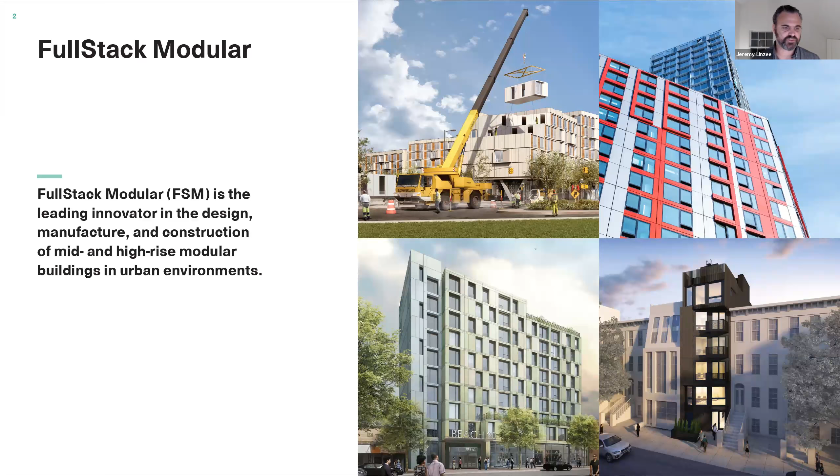So just a little bit about us. We're based in the Brooklyn Navy Yard. We're one of the leading innovators in the design, manufacture, and construction of mid and high-rise modular buildings in urban environments. Our approach is technology-driven, fully integrated, and radically efficient. So we can build complex projects faster with less disruption, lower cost, higher quality, and importantly for us now, a smaller carbon footprint.

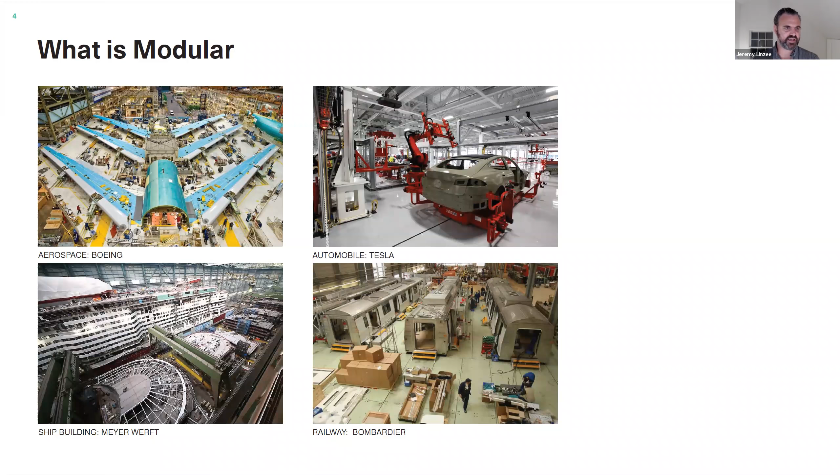Essentially, the first question a lot of people are asking is, what is modular? What does it mean to make a modular building? The first very broad description is essentially it's building something in a factory. It is manufacturing something in pieces that can then be brought to site. And of course, so many industries today are manufactured in factories and then delivered to a site.

The modular we're going to be talking about, and I think the one that is seeing massive growth and has potential for massive growth, is the multifamily and sort of larger scale modular. Within this conversation, there is another whole set of this for modular single family homes.

There are pluses and minuses to that approach to modular. We're not going to get into that here. So when we're talking about modular in this conversation, we're going to be talking about multifamily structures. You can see stuff is happening in Europe and has been happening for some time, and is now just beginning to happen in the United States.

Two notable projects in New York were the micro housing project, which was actually designed by my friend Mimi Hoang from nARCHITECTS, and the project that FullStack was born out of, which is 461 Dean Street by the Barclays Center, which is currently the tallest modular building in North America.

Also, when we think about modular, companies all have different approaches and different strengths in terms of what they do. So think about, first of all, how the mod is made, and the two options on the market currently are wood and steel, and then how much of the process is integrated. For instance, how much of the building does the modular builder actually build and deliver to the site?

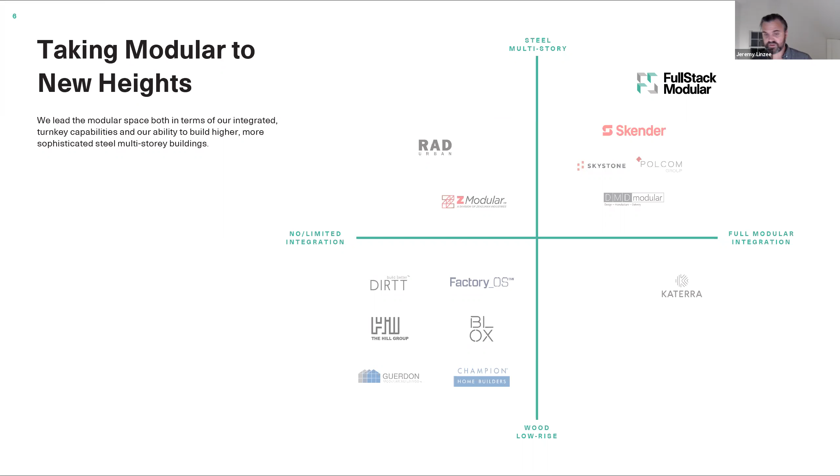For instance, in FullStack's case, we build higher than any other modular company, and we also integrate more. Other companies choose a business model that does not do that. And frankly, right now within the modular industry, we're seeing a winnowing of companies due to different business models. So it's interesting to see what will come out of this current marketplace and how it will work.

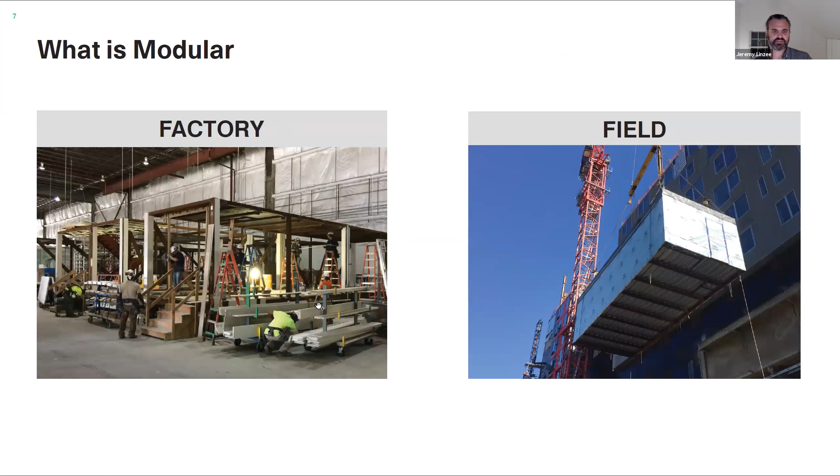There are two sides to modular: there is the factory side, what gets built in the factory, as I was saying, and then what happens in the field. So these are all some basic ways to understand modular. And this is a photo of our factory with Dean Street underway.

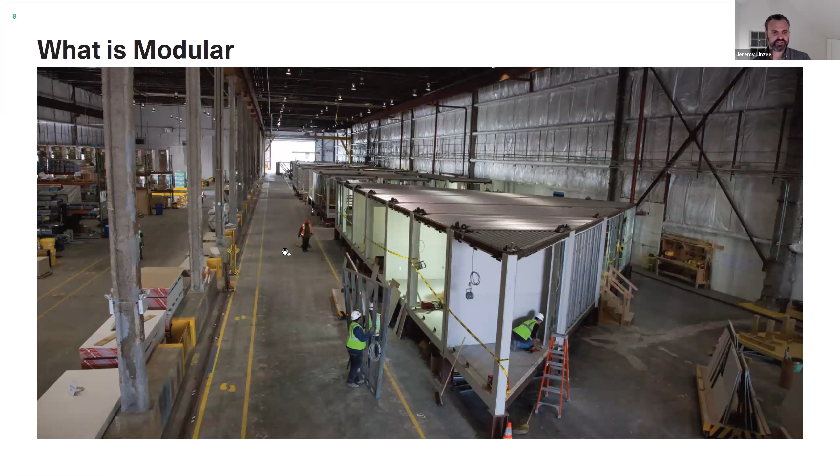The other thing about modular is basically the delivery system for the building, for the units. Modular buildings are built out of, essentially, we sometimes even say it's like Legos. You have boxes that stack, and that box will have a mate line where it joins the other box. It will have a chassis. Some are wood, like I was saying before. In our case, we're going to focus on the steel chassis modular system in this presentation.

And a lot of what then goes into that chassis is built as an assembly and a sub-assembly. So from a chassis to a bathroom to carpentry, to full finishing, to an enclosure, all of those things will be installed in that box and then delivered to the site and then stacked. And we'll go over that process a little more in depth.

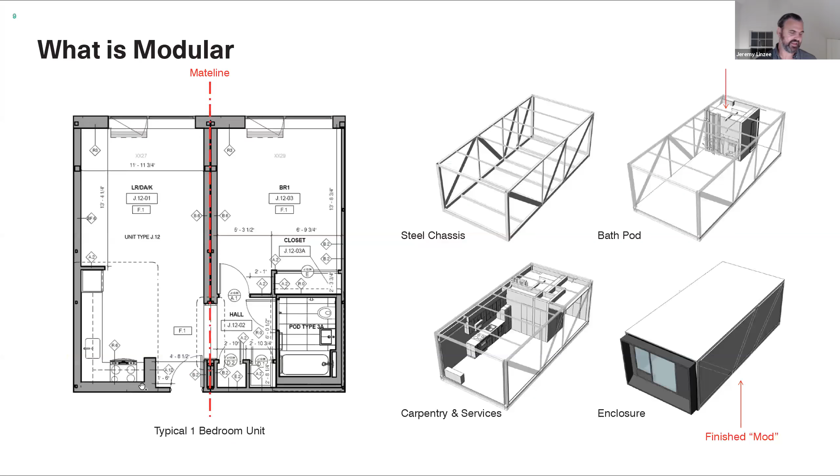Also, speaking of disruption, there's less neighborhood disruption, and also 67% less waste, because a modular building is built faster, and also because its major building components are assembled off-site and then assembled on-site very quickly. For instance, we can stack 10 to 15 mods a day.

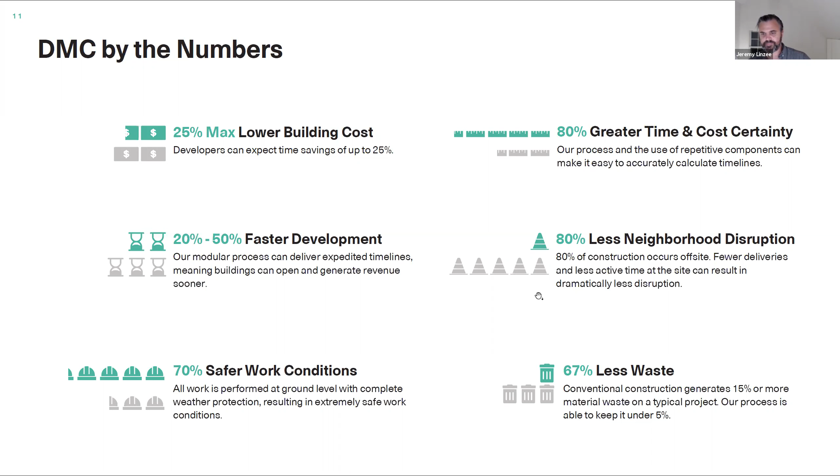There's a lot less neighborhood disruption. Interestingly for us, and this is maybe for another discussion, but I put it here, how you contract design, manufacture, construct services is still very much something we're trying to get right.

In our current arrangement, we typically do an analysis and initial estimate before we engage with a formal contract. We then go to a modular blueprint agreement, which takes us through a schematic plus. We call it an engineered schematic, where at this point we have 80% cost certainty. The final stage, the modular construction agreement, takes us through the remaining parts of design and then through to construction.

Design, manufacture, construct. We're going to talk about each of the phases. The first is design. Modular analysis, design for manufacture, and integrated digital workflows are all happening all the time in our process. In many ways, a modular building is a manufactured product, and therefore it wants to have a logic and an ability to be replicated.

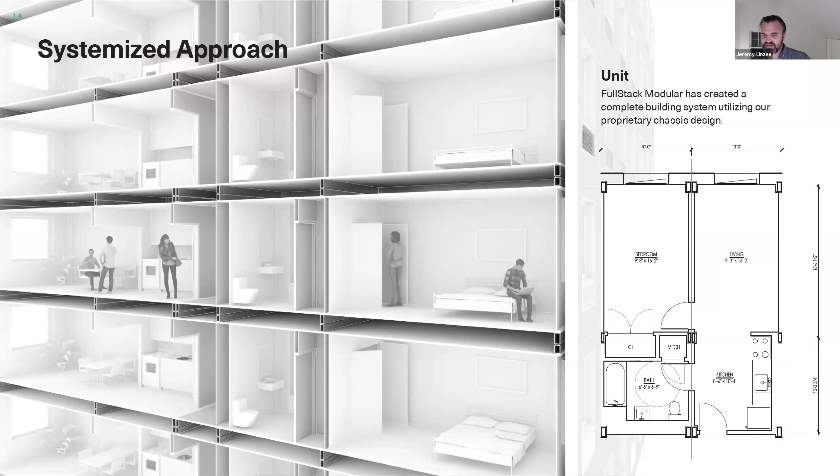For projects that we design in-house, we've developed a series of flexible components, and the goal in this design process is to have the fewest different components necessary. In a way, designing a modular building is like a bunch of information going in and spitting out a building. The more elegant, clean, precise, and efficient that code is, so there are the fewest discrete parts, the more successful that building can be.

Interestingly, when you read about modernism and the theory of modern architecture, there's a lot of that inscribed in it. But that's more of a history lecture, so we'll avoid that.

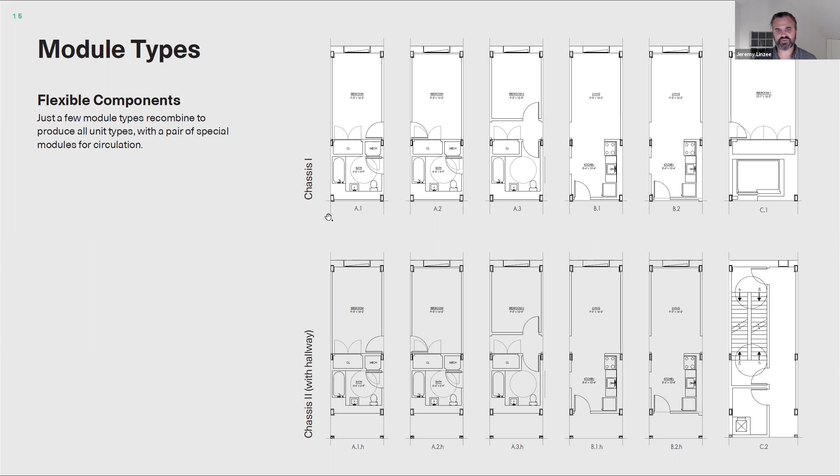With our flexible components, which can create all sorts of different layouts, we then make unit types out of them, and can organize unit combinations very rapidly. We have a parametric system set up for that organization, which, if we have time, I can preview at the end, but I want to move through the main lecture.

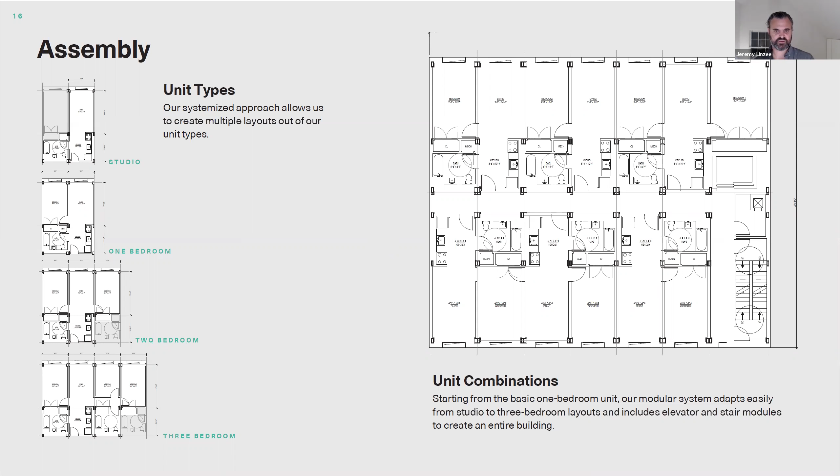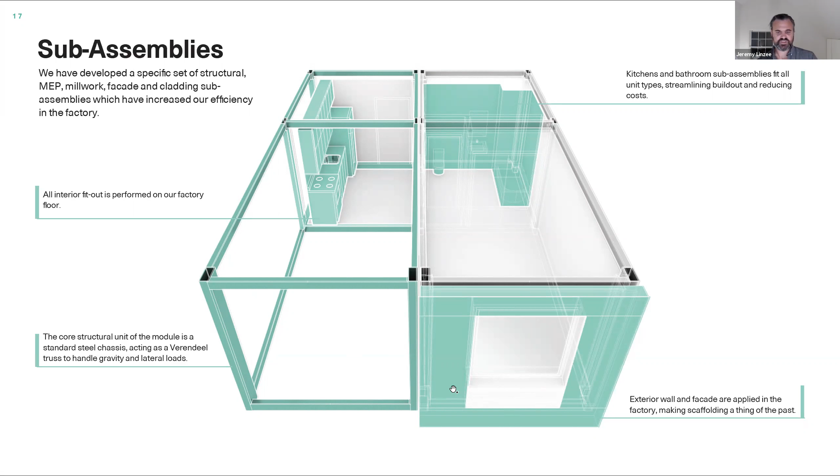Everything going into the chassis is thought of as a sub-assembly. The kitchens are sub-assemblies with their own sub-assemblies. The bathrooms are the same. The facade is also a sub-assembly. Typically, facades are fabricated by a separate facade manufacturer and then brought to the factory and made part of the final assembly.

Some of the innovations FullStack has come up with are, one, our structural system, which we'll describe in a second. Self-sealing facades are really important for us. When you use our mods to stack a building, the result is that it is watertight. The mods stack and seal. So we don't need to bring scaffolding back to seal up the exterior of the building.

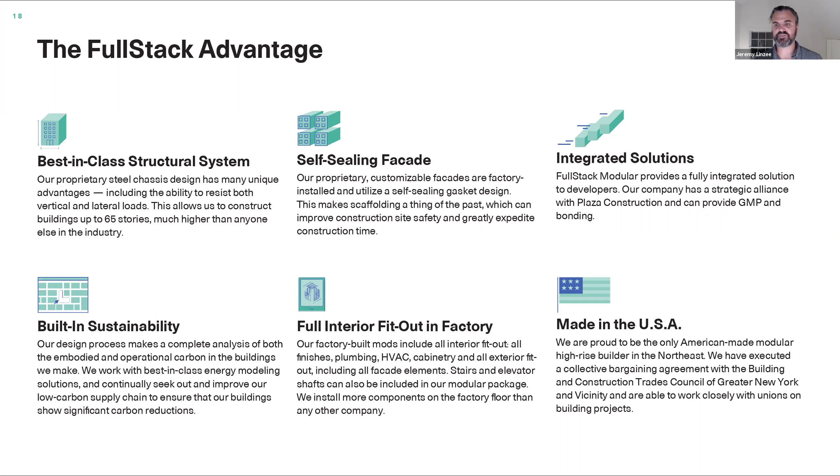We are also constantly engaged in developing our design technology, whether it's parametric design, integration of that design into the factory floor and site management, as well as incubation with other like-minded software or technology producers.

We learned this somewhat the hard way on Dean Street, but in manufacturing you're always trying to make something better. Dimensional accuracy is the key. We typically operate with a tolerance of 1/32 of an inch, and everything starts with laser metrology to assure that all of the mods are within those parameters.

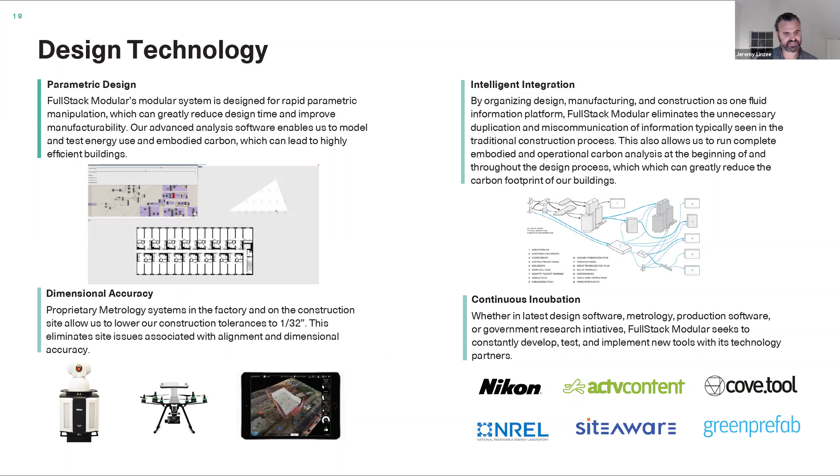We also use drones to do site metrology so we can measure a poured foundation and figure out where it is off, so we can make adjustments both with our adjustable pieces and within the mod shimming itself.

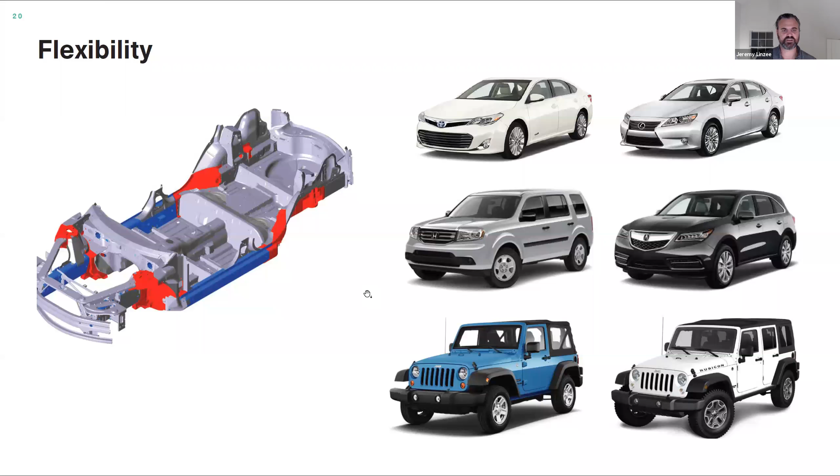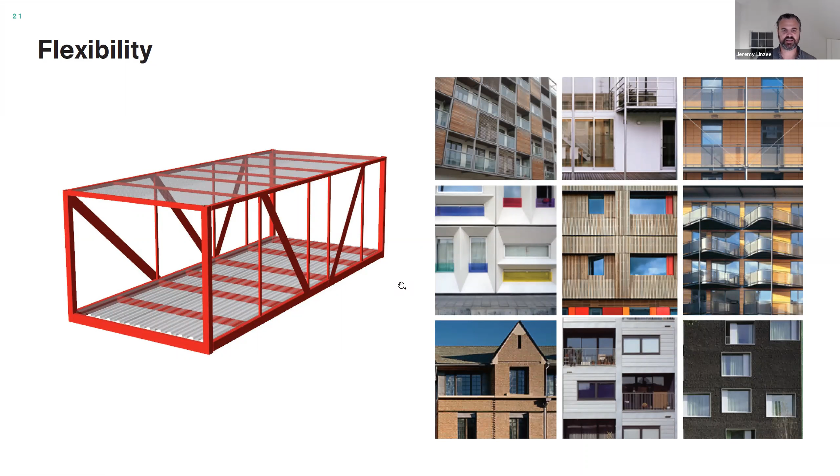Within the design process, we're always thinking about flexibility, like how does one chassis system create six different automobiles? For instance, with our chassis, all of the different kinds of facades that we can apply to it. That's important, and it comes through in our recent work.

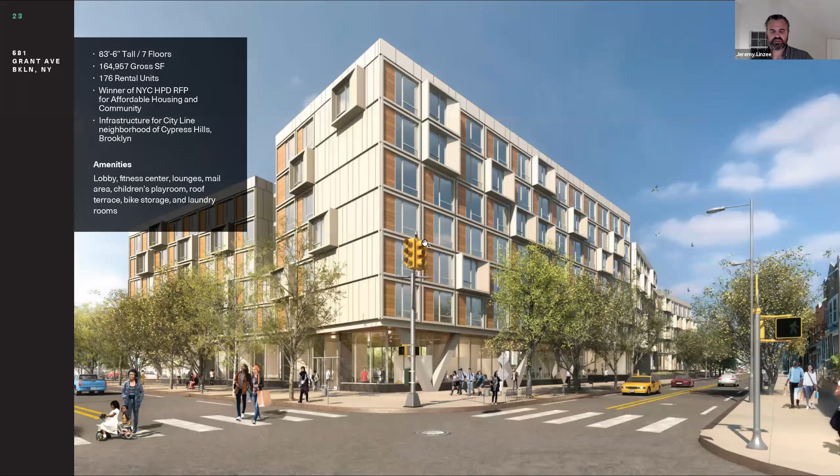This is Dean Street in Brooklyn. And then 681 Grant, which is a project we've been working on with Think Architects in Brooklyn in the Cypress Hills neighborhood. We also have a 6-story walk-up in Harlem and an 11-story building in Queens, to name a few.

So then the manufacturing side of things. So typically, we start with the chassis. It's the building block of the system. It's the first thing that goes onto the floor. It is made out of steel, and we've been working with Arup for the last 5-6 years on creating a very robust system that has sort of built-in logic so that when we engage each project, we have a starting point already in our design that can then quickly be oriented to that design's needs. And then, of course, sub-assemblies, which we're going to work with to create all the things that will then go on to the assembly.

And a lot of what we do starts like this. We will work with the architect or sometimes in-house to create a very, very robust Revit model. And the Revit model is basically the key. I'd say we have almost the bolts in this model of where everything will go. And then that Revit model will be, well, I guess not exploded, I guess carefully positioned into our fabrication documents. So the ceiling framing will come in as a ceiling framing document. Wall finishes will come in as a wall finishes document. Plan and fixture types will all come out.

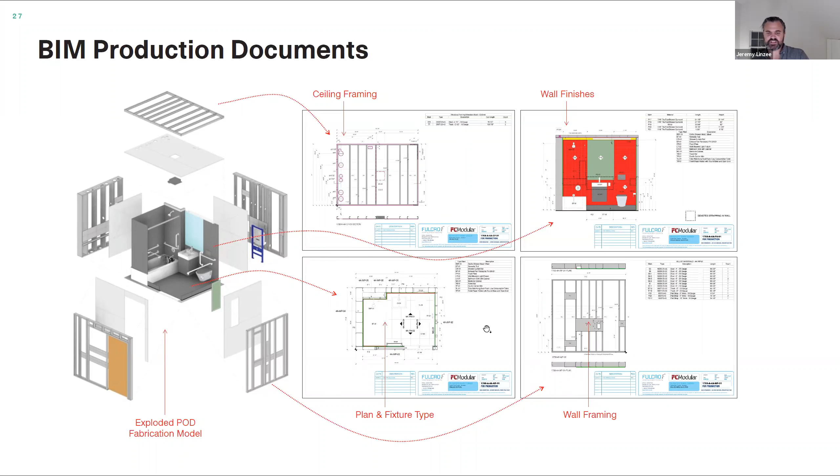And this has become a very interesting learning process for me as an architect moving into this space, the power of it, and also how procurement shapes design. Certain things are available, certain things are not available in certain timeframes. And so how we develop the supply chain as architects actually becomes an interesting question, and one that when you sit in the modular design chair becomes very apparent very quickly.

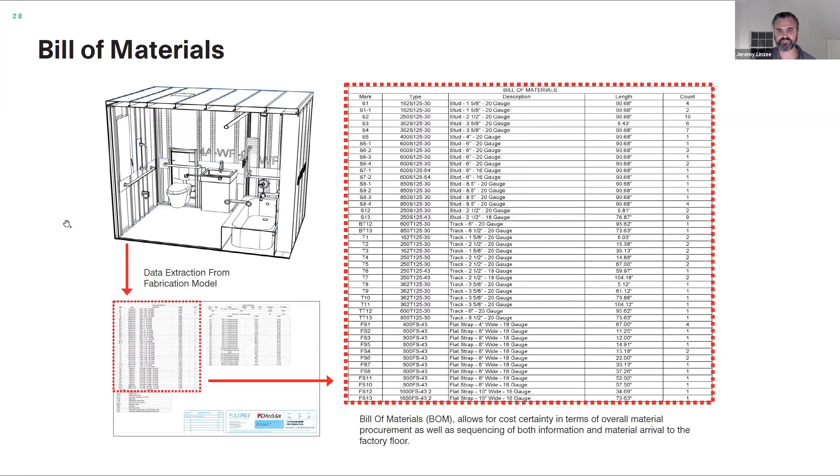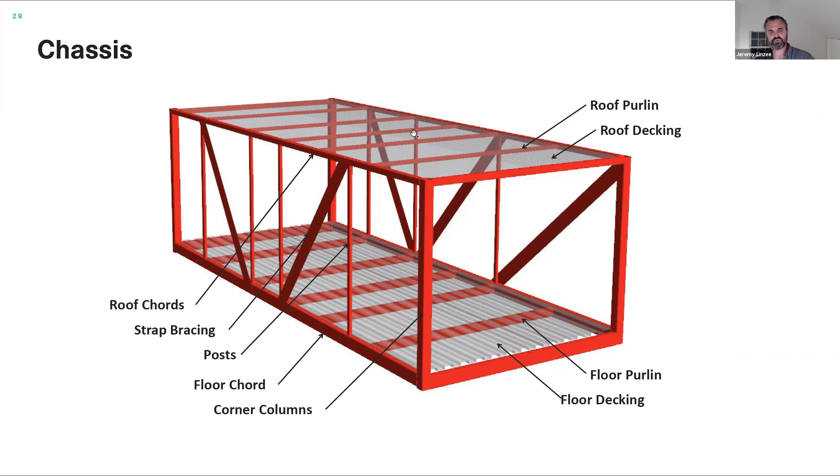So then the chassis itself, steel welded. We've actually refined this design and simplified it with Arup. This was the chassis used in Dean Street, but we now operate with basically a 6-column structure. We've taken away the straps, which tend to flap when the trucks were driving down the highway at speed. These would start to vibrate, and it would get a little crazy. So now we typically have 6 columns on each side, 1, 2, 3, 4, 5, 6. Those will transfer all the way to the ground. And it's a very, very simple system.

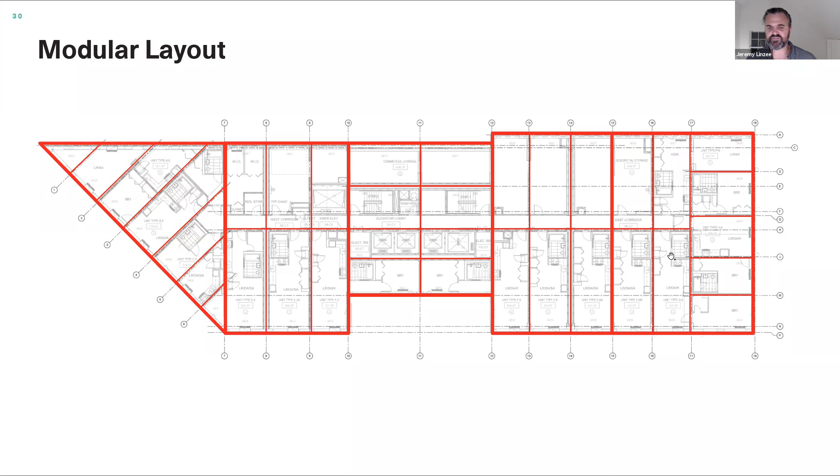Also, a lesson learned from Dean Street: triangle mods do not work. This was actually a real nightmare when it came to getting it right. It was gotten right, but you learn quickly, like, this is not ideal. Also, the fact that there were mods turning in this way was also not ideal. And so we try to work through buildings with a very, very straightforward grid system as best we can.

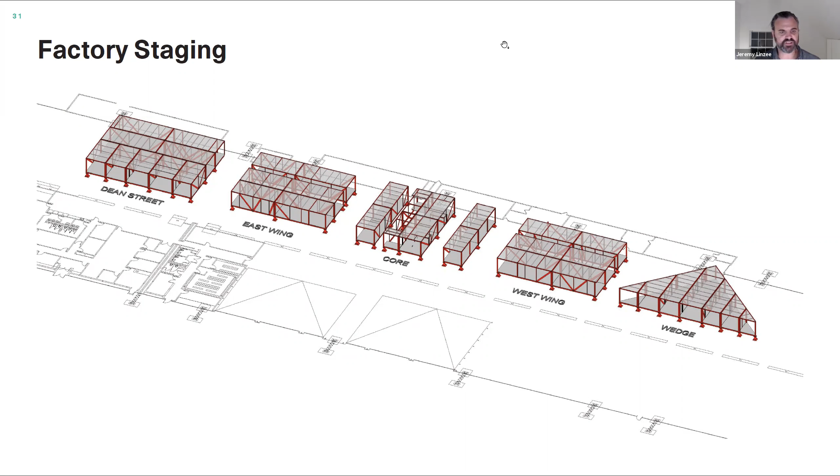Here's the factory staging. This is sort of the floor plan of the factory and how each type of mod was set up, constructed, put on a truck, and then brought to site and stacked. So this process would be ongoing. And here's some images of that happening.

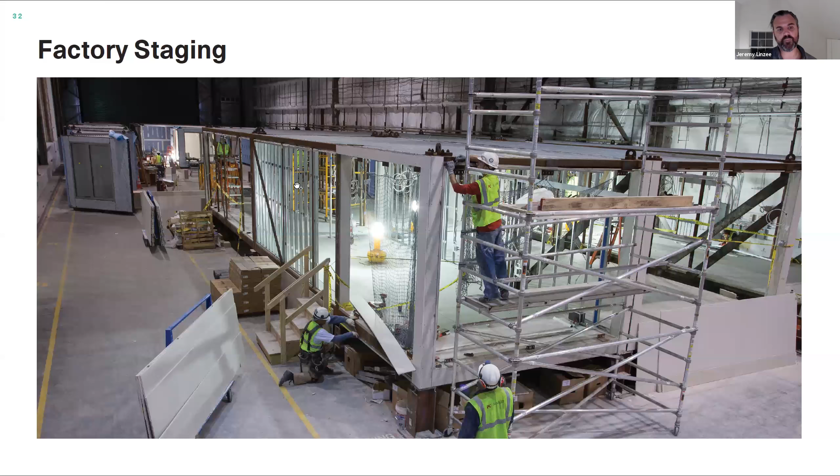You can see, for instance, this wall here, or this framing here, would have been constructed from a fabrication document on a table, which I'll show you in a second, and then brought here to be assembled. So it would not be assembled stick by stick. It would be fabricated as a whole, and multiples of these would be fabricated at once. We'll get to that in a second.

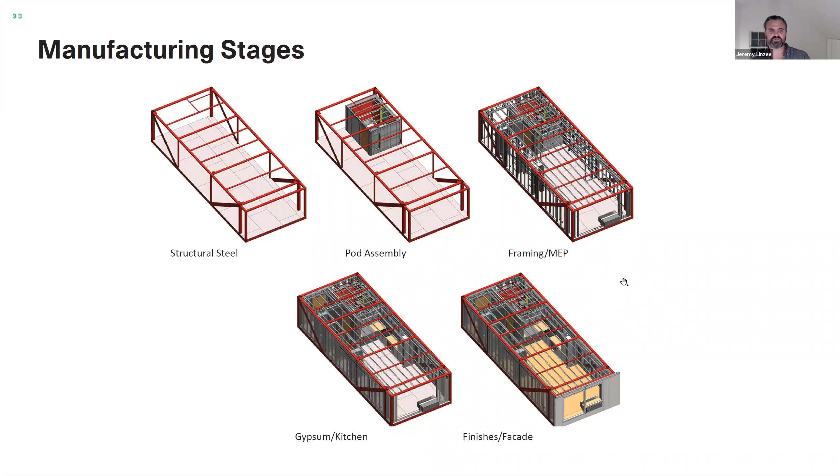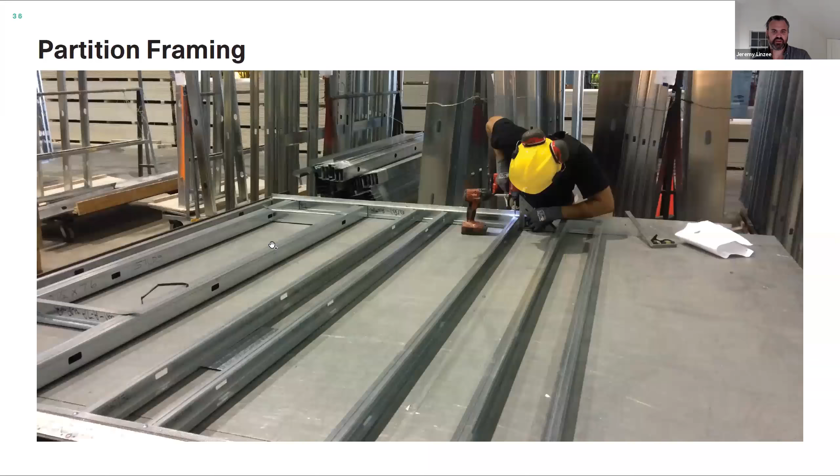So the order is structural steel, pod assembly, framing, and MEP then goes in. The kitchen, the gyp walls, and then the finishes and the facades are the last thing we put on in our process as we build out the mods. And MEP, we actually have a high level of completion of the MEP. Typically in the building, there is a single chase, typically in the hallway, which runs the length of the building. And then, of course, interior finishes are all done in the factory.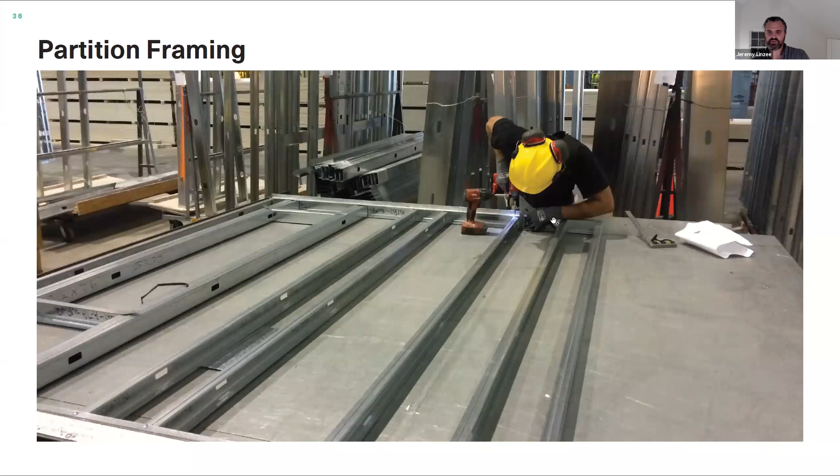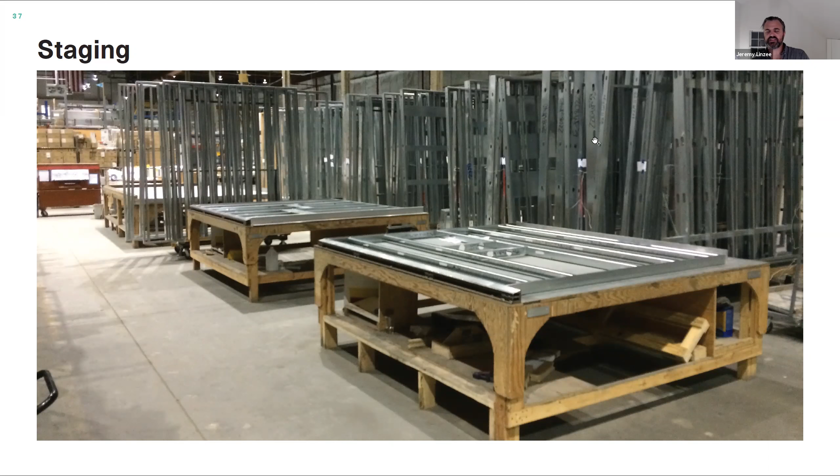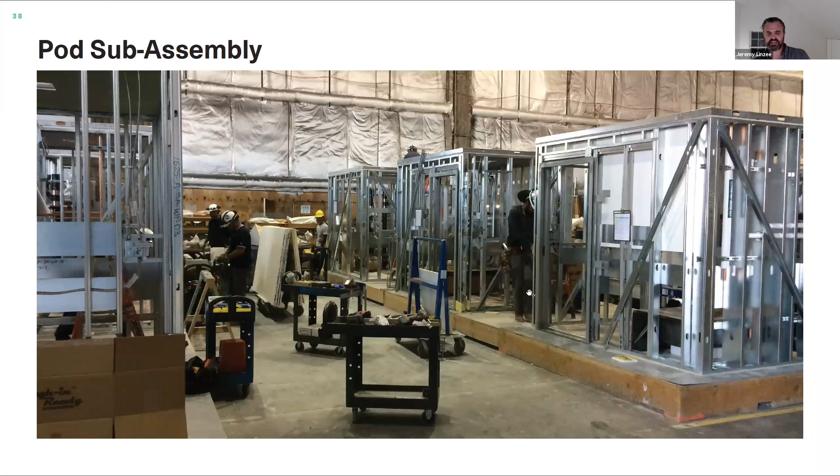Here's that framing table I was discussing. Again, one worker will work on multiple of these in a day. As mods get repeated, they'll be measuring from a simple layout set, which will dimension to each edge and very quickly be assembled. And here's that staging. You can see how multiples have been created, labeled, and there's an extensive QAQC process which identifies each assembly or sub-assembly, locates it, checks it, makes sure it's completed correctly, and then assigns a yes that it can go into the assembly. Here are bathroom pods being assembled.

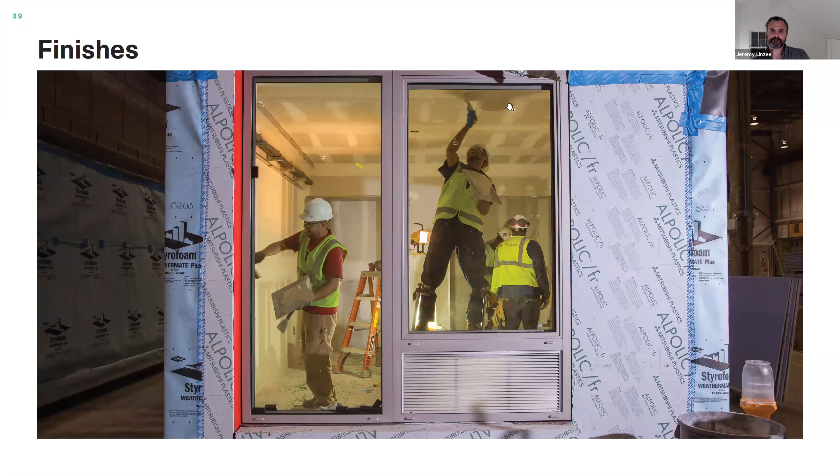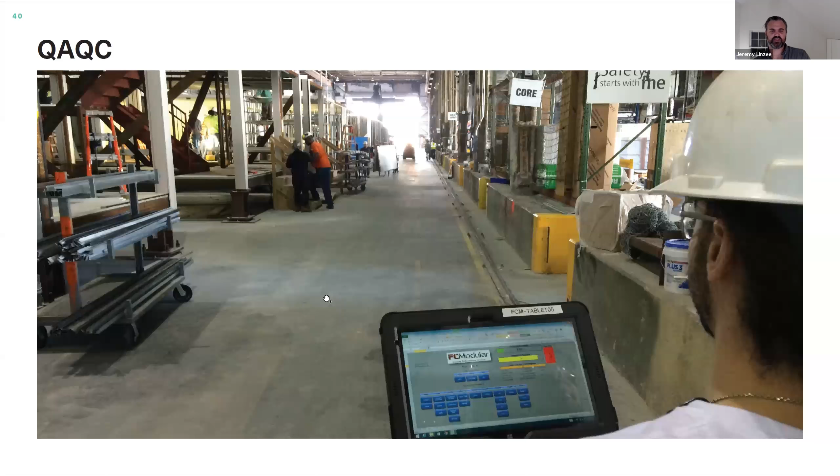And then here's the facade being put on with the gyp as well going up inside. Again, lots of classic manufacturing QAQC processes involved. And then once we're ready, that mod gets picked up from the floor and brought out to be put on transport to the site. And then it becomes part of the construction.

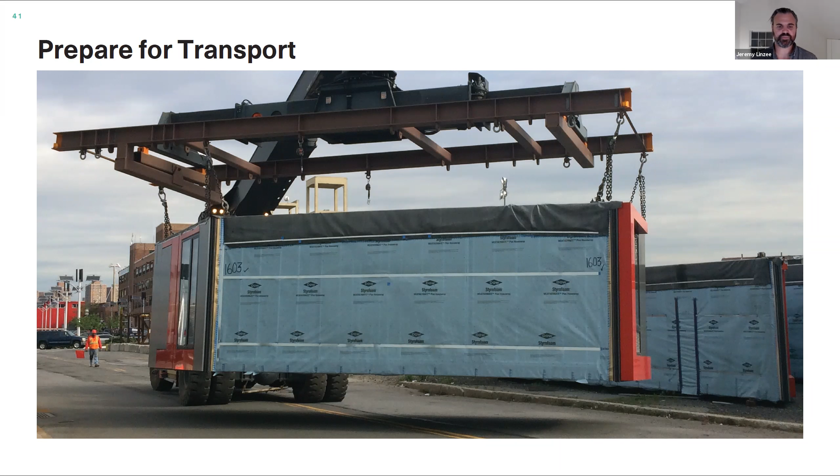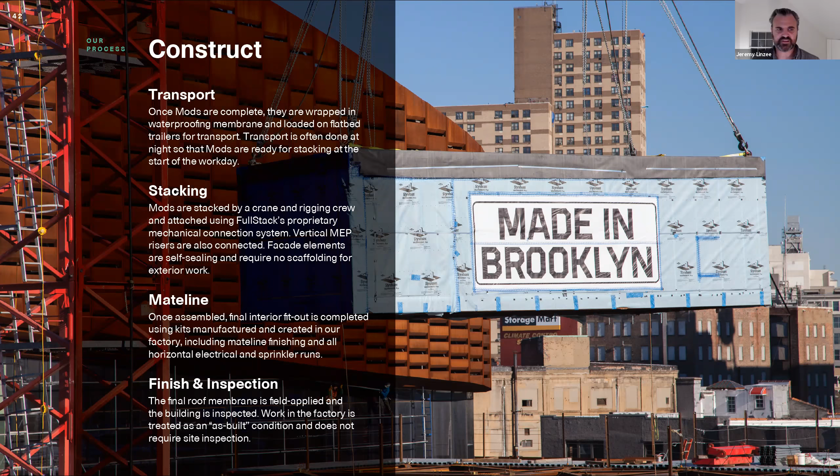So, construction involves transport. Transport really is the key to modular. It is the limiting factor of a mod, essentially. So we work within dimensions of, 16 is the max, but typically you don't want to go over 14 because then you are an oversized load, which requires a lot more expense. So typically we're working within a 14-foot wide chassis or mod. And from that, the longest we can make is 56 feet. Some sites will not allow that just in terms of logistics. So mods will be anywhere from 30 to 40 to 50 feet, somewhere within that range. Mid to high 30s is typical.

So, field work. Now we're in the construct part of the talk. The beginning is, of course, incredibly typical. This is where the typical construction process is engaged. There's excavation, there's foundation, utilities are brought in, and in many modular buildings, the first floor with its longer spans can often be traditionally built. Whether we need a brace frame or not: our modular system up to 18 stories does not require a brace frame in a non-seismic area. And so the mods themselves create all of the structure.

Now we're working on a project in Los Angeles, which has high seismic activity, and so we're working with Arup on a brace frame for that. It's a 15-story building, which needs to drift considerably. And then the module erection and the mateline connections. So obviously boxes have been stacked, and the last part of the construction is those gaps between the stacked boxes are filled in and made good. Typically, from a cost perspective, the field work is roughly 40% of the cost and the factory work 60% of the cost, though depending on whether the first floor is modular, this can change slightly.

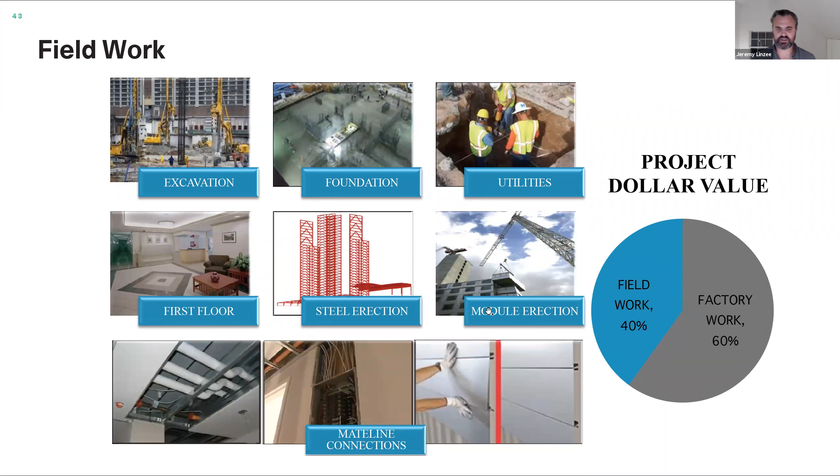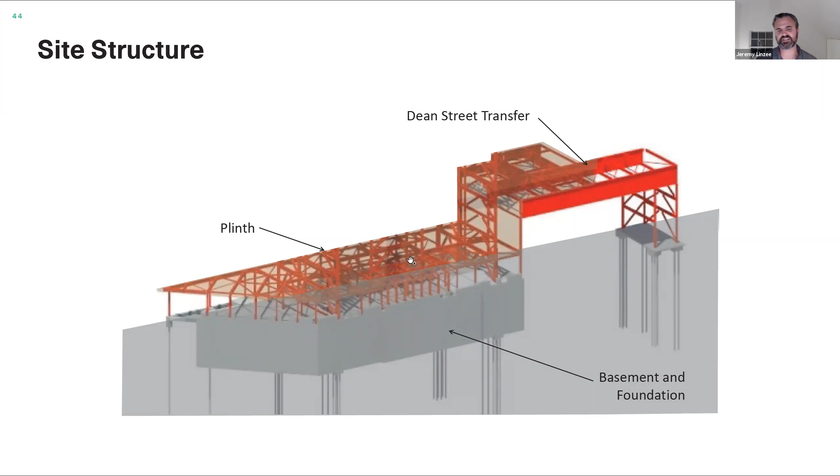Site structure: in this case, Dean Street had a plinth, a structural steel plinth, and also needed a transfer, so it was pretty robust. But this is typically how we'll set up the base. Obviously not with all of this complication, but typically we want a flat structural table that the mods are going to stack on. And here you can see that base and some of that staging, the first stacking happening. Typically the mods travel overnight.

So we like to send 15 a day to the site, and they get on the truck, they head out and are there queued up for stacking in the morning. So we typically don't like to bring mods and just drop them off. You always want to lift the fewest amount of times possible. So we like to lift onto the truck, then lift when we get to the site and place. And so there you're seeing some of the first two getting placed out on the site here.

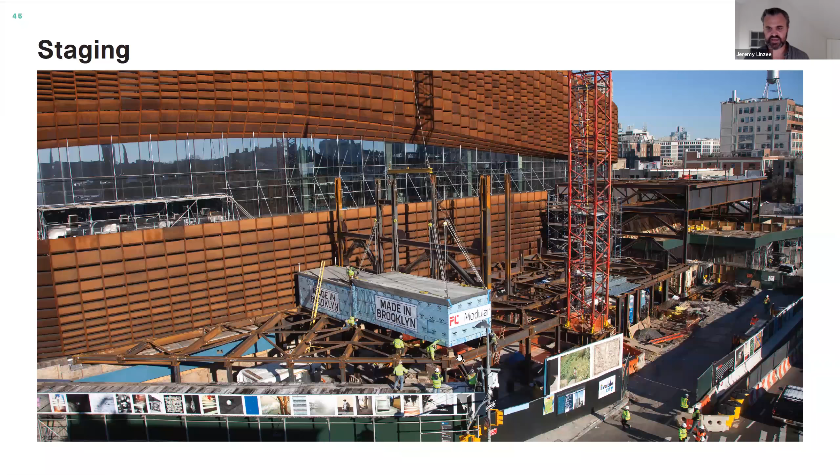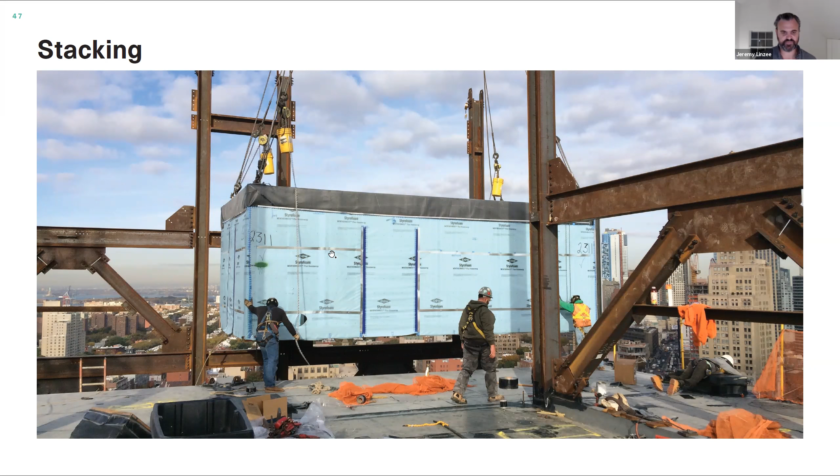And then the stacking: as the building gets higher, the crane gets higher or has been erected to the height it needs to be. And then mods are brought up and stacked. Here you can see the mods negotiating the brace framing to be stacked in the proper place. And this, just a little bit about our structure.

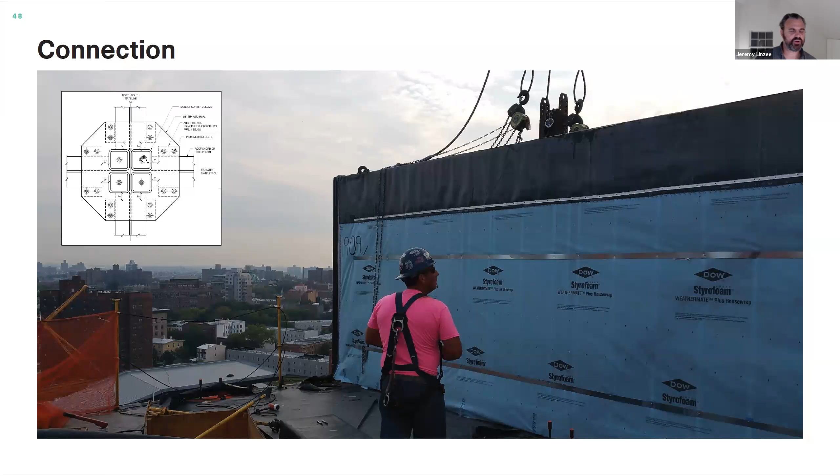So this is a typical, sort of a meeting point of 4 mods. And here is their corner column. I believe it's a 6x6, which is typical for Dean. And the way they work is they're not only in compression, but they're also in tension. And what we do is we have a threaded rod that runs down the middle of each hollow column. So the threaded rod will be there.

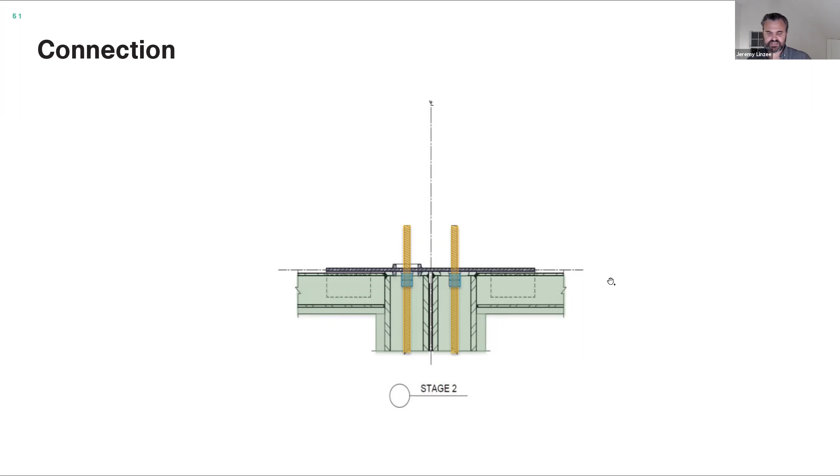I'm going to take you through a brief description of how these connect. So this is obviously in section. The threaded rod is now poking through the steel post. The first thing that happens is bolts are rolled down to the proper location, and then the connecting plate is placed on top of all 4 of the chassis posts. And then the top bolts are placed. So that top plate is bolted to each chassis as well as to the threaded rod.

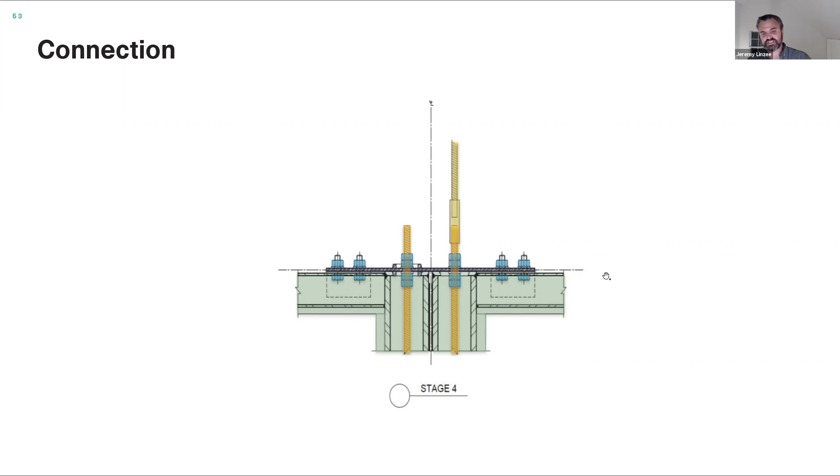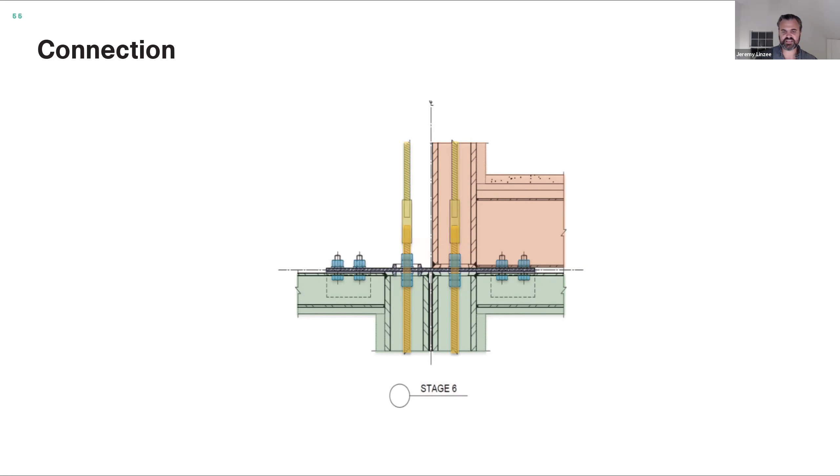The threaded rod now grabs it. And then the next threaded rod is installed, and then the next mod is placed, and the process repeats. This allows us to keep the building both in compression and tension. So this process allows us to tighten these up and assure that the connections perform structurally in a very advantageous way. The last is the MEP mateline.

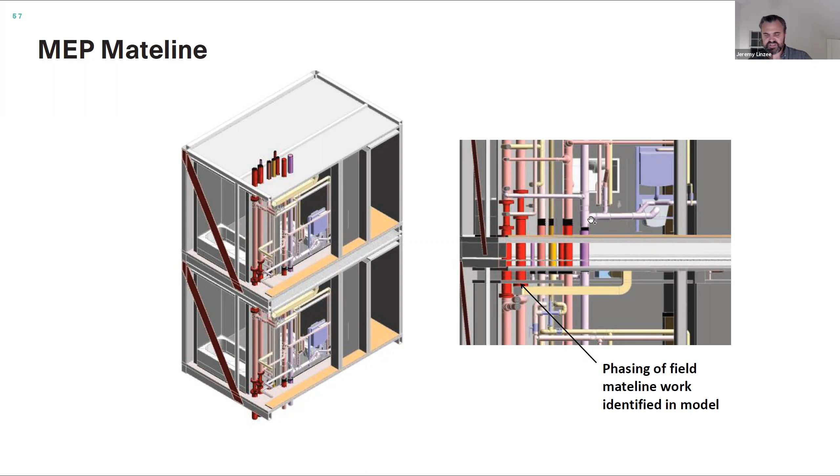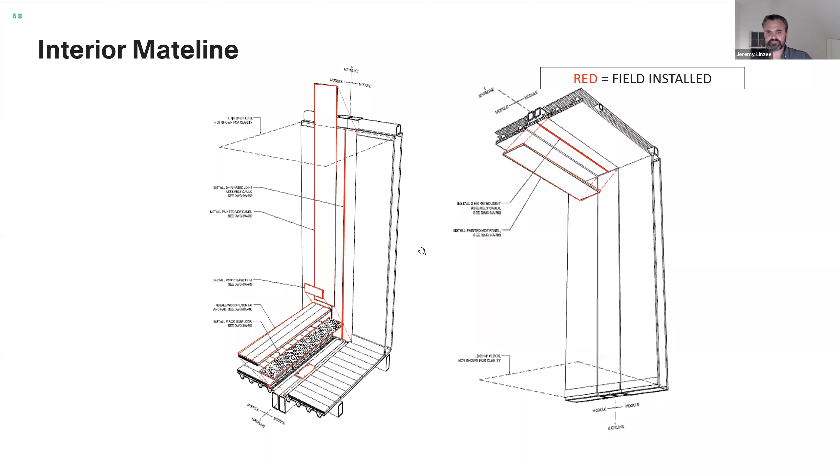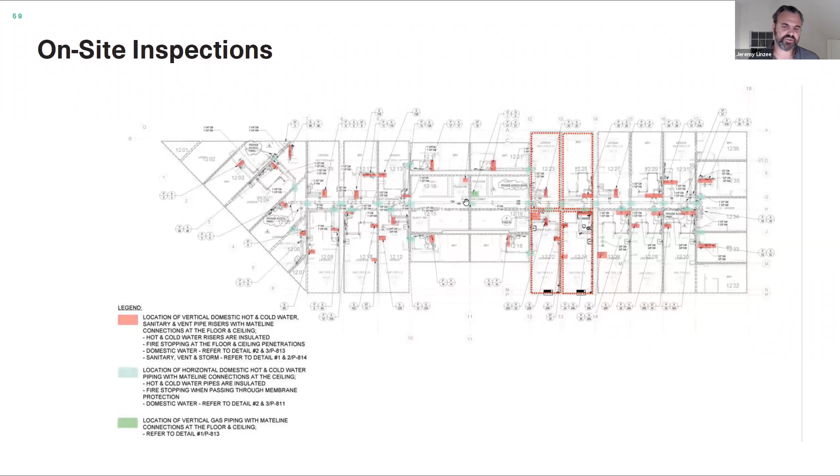Interestingly, on-site inspections. When we work with the on-site inspector, they see anything built in the factory as an as-built. So the drawings almost read as if this was a renovation at this point. And so they'll be looking at any field work that has been done, and they do not need to inspect the plumbing or the electrical that has been installed in the factory, which is all certified by a third-party inspector, which is handled by the state.

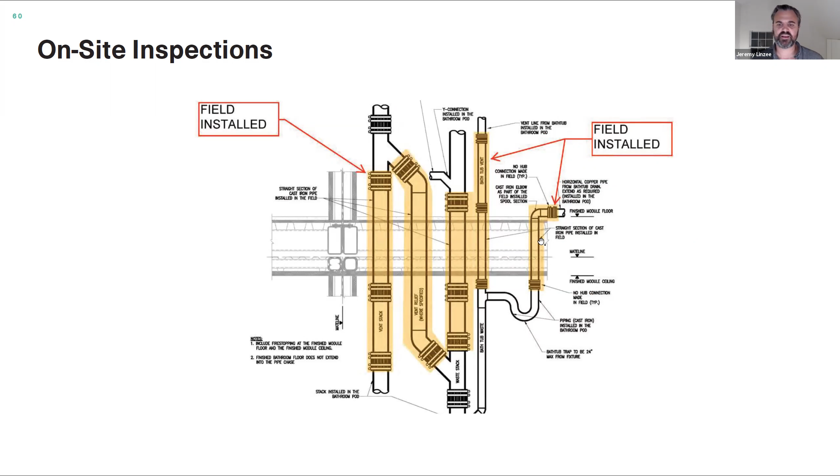And so you can see the difference between the field installed and the pod installed or the mod installed. Here's a section through the lower chassis points, the upper chassis for the lower mod, and the cavity there. And then some of the things that they'll be looking for in on-site inspections. Also, we'll need to have horizontal connections made. So typically sprinkler pipes are then connected as well across the mod. Sometimes we will have an entire sprinkler pipe installed in the field if it makes more sense. But you can kind of see all the different systems in place here.

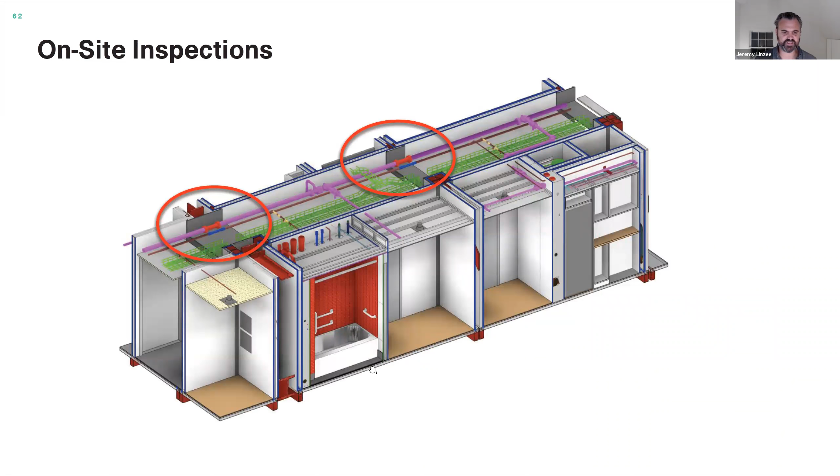And then, as a modular, the dream of modular, and in fact the challenge of modular, is sort of like designing the first light bulb. It probably cost Edison a lot of money, but once he got that light bulb and he could mass produce it, the rest of the light bulbs, it was amazing. So we're working in the same way. It's like when you do that first prototype, only if it's a typology that can be repeated. And we're really trying to work on that.

How do you find a situation with a developer or with your own company that you can not only design a project for someone and build that project, but design a project that you can repeat over and over again? Because once you have that fabrication set of documents and that fabrication process ironed out, to make another one is even quicker. And then to make a third one is even faster than that. So there is not only an efficiency of scale in the actual building itself, but doing multiples of that building is where the real efficiencies begin to be very, very apparent.

So what we do is after the building is completed, we have a product library created out of the project design information. So if a client comes back, we have everything ready to go for another build, and any changes that need to be made to the original can be done directly.

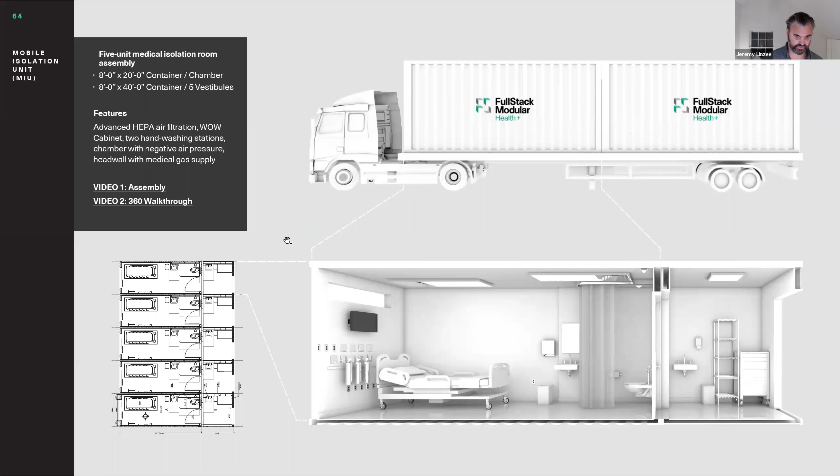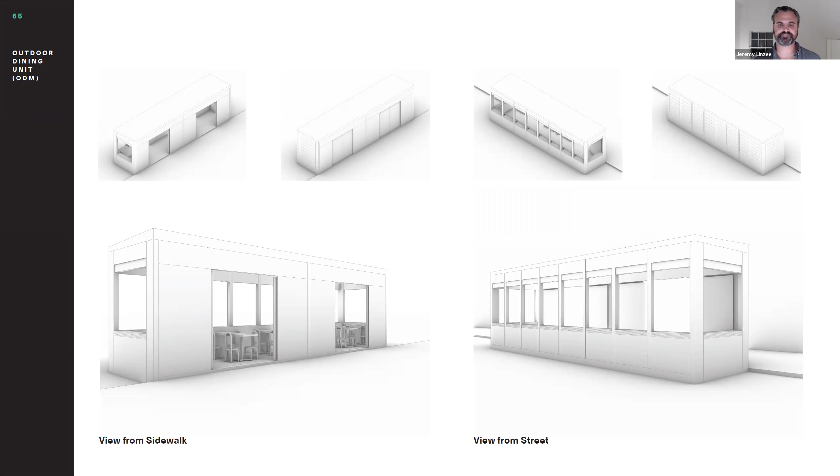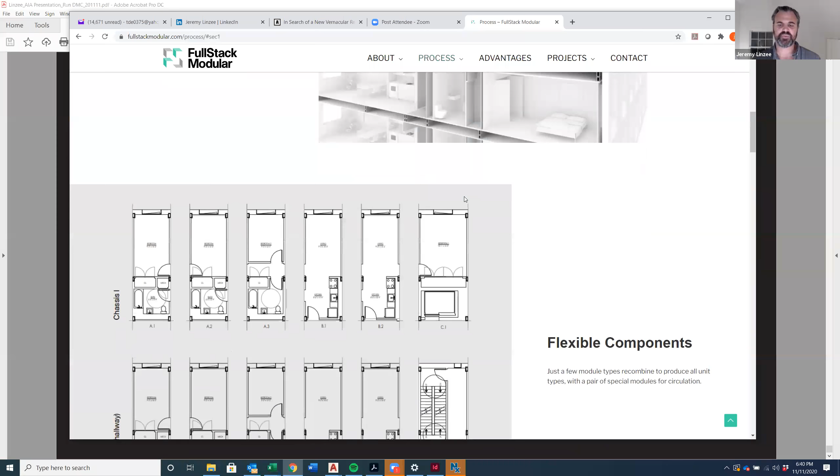And then, excited to open up for questions. I wanted to just quickly show something on our website. I'm not going to take very long so that we can get to questions, but wanted to show you our initial parametric. Again, this is early development, but a client-facing product which helps us. We call it our design layout tool. You can do this at home if you like: FullStackModular.com, under the process heading.

Essentially what it does is it takes that unit type, and it allows you to start seeing what our unit type can do for your building. So let's say you have a very typical 3-lot, so 75 feet wide. The building depth is usually 65 feet, and the height, let's do 65 foot. What you're seeing right now is those first modular decisions you're going to make, right? So the typical width is 12.4 or is it 10.4? So we're going to have the apartments a little bit narrower.

Then the unit combinations, we're still trying to work out a better rubric for how to organize and display them. But within those components that this has quickly assembled for us, in this case, with 75 feet, we're still within code for a double stair. That stair could also potentially be in the middle of the building. So maybe our developer wants some studios, but mostly one bedroom. So there's our layout and our floor options, floor count. Basically, we're at a 6-floor building.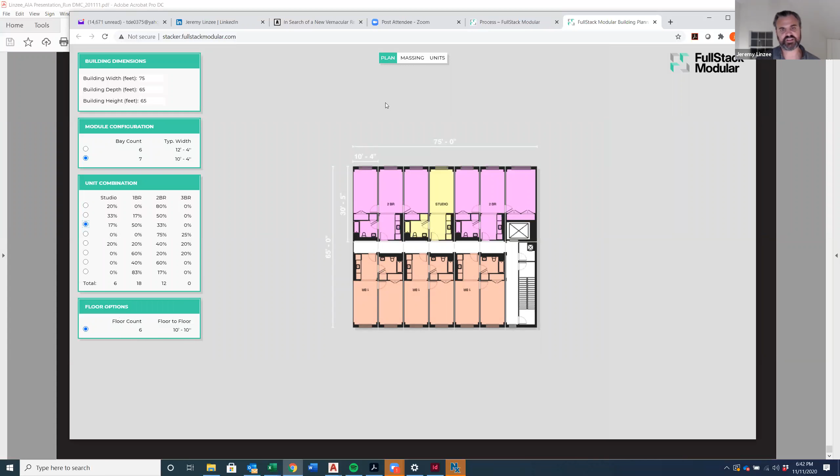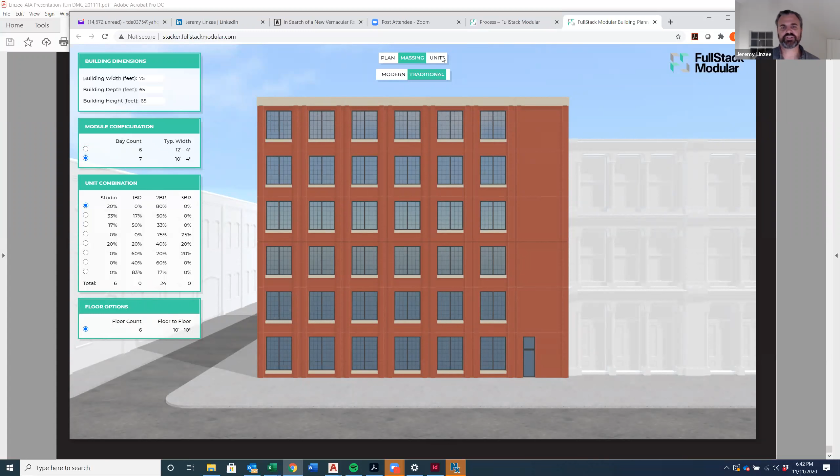So if I'm the developer, I can then go look at that massing, which is actually parametric. So let's say I want to see, what does a wider bay count look like? I can start to look at that on the facade and also look at it in a more traditional kind of brick way. And then I can also start to look at the units. So if this is my basic 1 bedroom, which is typically the heart and soul of the building, I can now go in, take a look. What does this look like for my building?

In a way, it seems like it'd be nice. Ceilings are pretty nice, so I've got a 10 to 10. Here I've got now some options. Let's bring that down. So here's a 70-foot high building. A 10-0 floor to floor in a modular building will bring you to, let's see, it's a 16-inch sandwich.

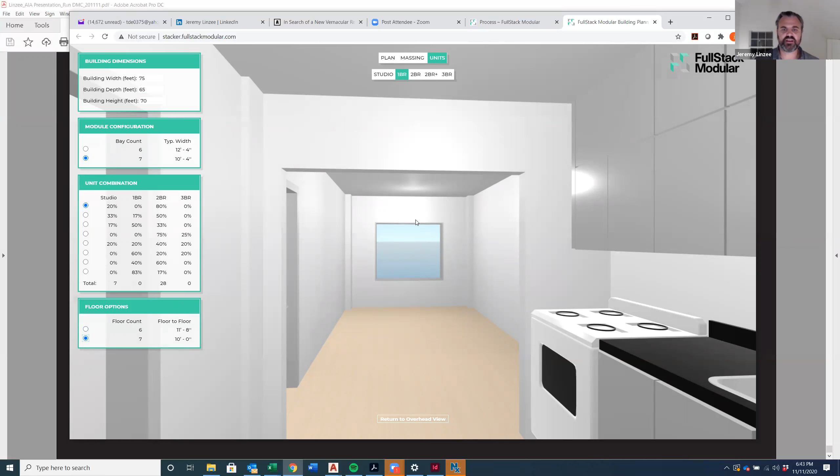So that will give me an 8'8" ceiling. So that's what you're seeing here. And I can also look at the 1 bedroom again. Check out the bathroom. And also, again, in real time, decide, I think this mod may be a little bit too narrow. Let's start to get a feel for it in a wider variety.

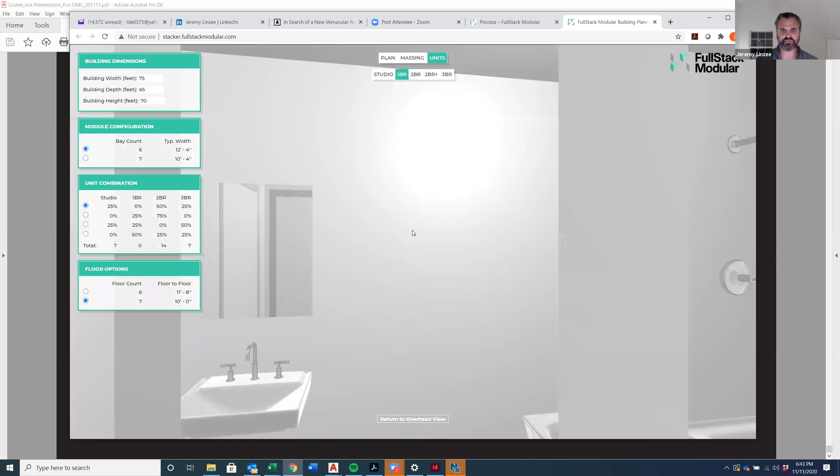So that's what I've got. I think we're at 45 minutes, so I want to stop there and take questions. And I'm going to keep the deck up so we can go back to a slide if we need to reference it. Great. Thanks, Jeremy. It was very informative. Got a bunch of questions, so that's great. Let me start here.

First question, is the structure just for transport of the module, or is it the final structure of the building? The final structure of the building. Yep, and that's what's great about it. The box is the structure, except for the time where I mentioned we have a brace frame, which will happen in seismic areas or over 18 stories.

What are the maximum chassis dimensions, length, width, and height? Sure. So 14, maximum is 16, maximum length is 58, maximum height I've heard as high as 13.6, but we don't like to go over 11.4 because of low overpasses.

Jeremy, you're speaking to the importance of maintaining tolerances. Are you experiencing any racking of the steel chassis during transportation? Chassis are super stiff, so no. We've had really good results. There's always something little damaged at some point, maybe on 1 or 2 mods, but it's within. They're extremely stiff, and the transport does not damage them.